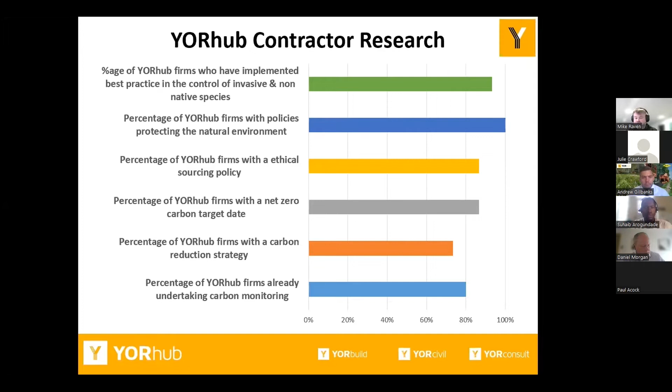And just to take off from where Mike stopped, it is important that YORhub, and indeed the whole industry, is measuring the same thing across board when it comes to carbon emissions, so that we can then move towards the reduction of the carbon. And so in a bid to ensure this, that's why the carbon KPI came about, to develop a KPI that can serve as a benchmarking tool across the industry. So to develop this KPI, we thought it was important to ensure that we involve the people that are at the center of measuring, and indeed that will be responsible for reducing this carbon, which are the contractors, who are the major stakeholders.

So the KPI development started with a stakeholder identification, mapping and analysis. So what we tried to do with this is to ensure that we pick those that are directly involved in monitoring carbon during construction projects. So upon analyzing this, we also thought it was going to be interesting to include people from both big and small contractors. So this was ensured during this KPI development. So we involved people from both tier 1 and tier 2 contractors.

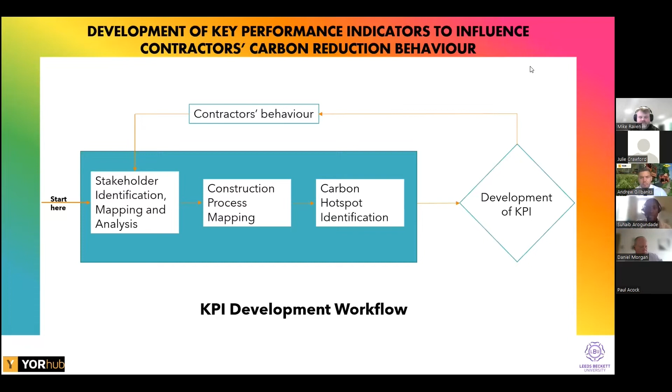So the next slide basically shows some of the KPIs. Indeed, we have about 41 of those KPIs that have been developed. But I felt it would be interesting to pinpoint some of those KPIs so that we can have a flavor of what this carbon KPI is about today.

The carbon KPIs have been categorized into both transportation and construction project/construction process, which is stage A4 and A5 of the life cycle carbon emission. This categorization has also been broken down into different activities that take place during the transportation bit of the construction project.

Transportation has subcategories: material transport, machinery, workers and visitors, and waste transport. Construction has about 8 subcategories, but this is just to give us a flavor. Out of those 8, I've decided to share part of the machinery, the waste, the material, and the workers and operatives subcategories, so the KPIs for all of these are what you can see on my screen.

For instance, under material transport, from the development of the KPI and the discussions we had, we identified average distance traveled as one of the KPIs that needs to be measured, renewable fuel usage on site, percentage of material purchased locally, and even the amount of material used on site also comes under that KPI.

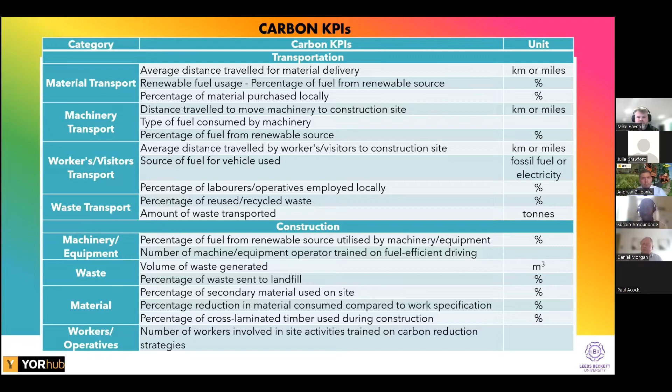So a wider survey has gone out for this, and we are getting responses. This is going to be used to pick the essential KPIs that would then be utilized. Just like Mike said, those essential KPIs can then serve as a benchmark for everybody, so that everybody is measuring the same thing and we can all understand that the reporting we are doing is actually similar.

So another wider part of this research is, after identifying those KPIs, they've gone out. Apart from those KPIs, there are other bits that have gone out with them, some from this model. You can see on the left-hand side the carbon reduction drivers. We've identified 18 drivers that could assist contractors to reduce carbon, such as probably introduction of standards like PAS 2080, probably incentives for contractors within the bid if that would drive them to reduce carbon on site, and some other drivers.

We've identified 16 barriers that could stop contractors from carrying out carbon reduction on site. Some of those barriers could be lack of support from top management within the contractor organization, or lack of collaboration between clients, consultants and contractors, which we found is actually a big thing. It could also probably be non-availability of low carbon materials.

All of this is going to be tested against 33 behavioral tendencies that we've identified. Those have been split into perfunctory, which is just talking about the carbon reduction target in the contract - will that drive contractors to reduce carbon? It could be voluntary, which is the consummate behavior. Or could it be that they need more relational behavioral tendencies for them to reduce carbon on site?

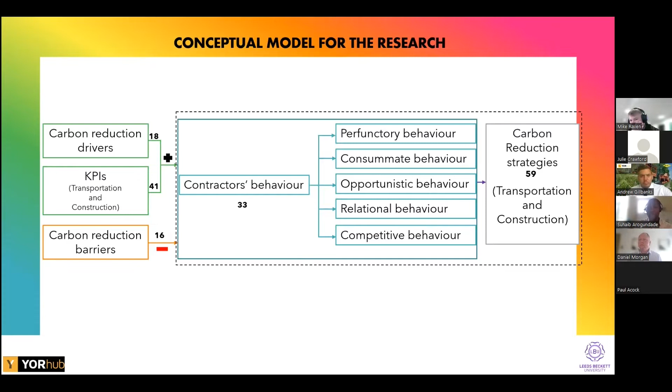Thank you, that's brilliant, thanks Suhaib. It's a massive piece of research that you're doing. It's absolutely critical for YORhub. I think also you talk about the wider industry, and certainly our colleagues in the National Association of Construction Frameworks that YORhub is a member of are obviously very interested in the work that you're doing. As part of the National Association, we're keen to make sure that what we're giving is aligned to our clients up and down the country, but also what we're asking our contractors to deliver are aligned again. Taking Colas as an example, and I'll shut up in a moment so we can hear from yourselves.

You obviously work across the country. You don't want in Yorkshire to be asked to be measured against one set of KPIs, and then if you're working over in Manchester, suddenly there's a totally different set. We're acutely aware that we want there to be good alignment across the whole country, so that we're disseminating our best practice, but also not making it overly difficult for people, because one of the key bits that Suhaib referred to in terms of the behaviours - we don't want to make things more difficult for our framework partners than we have to.

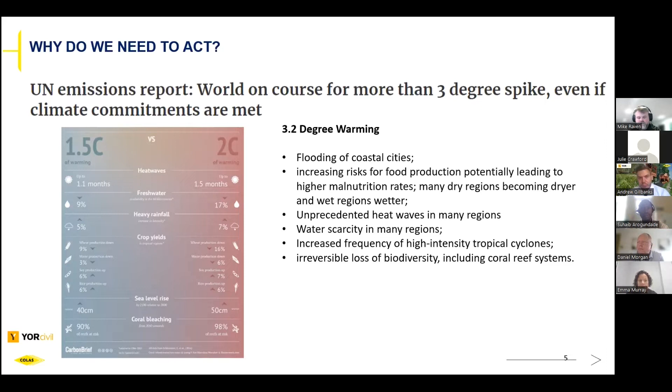So as part of that, we can see what the future holds for us. The IPCC report was produced, and this saw 234 scientists from 66 countries working together to show what the future holds for us with regards to climate change.

What they said was that climate science is clear. The physical science basis shows indisputable evidence that human activity is basically causing climate change.

It's showing that we're going to have heat waves. It's showing that we're going to have heavy rain, and basically human activity has caused this, and it hasn't been seen for the past 2,000 years.

So what that's basically saying to us is that these 5 key takeaways were the outcome of that report, showing that changes in the climate are widespread, rapid, and intensifying.

There's no going back from some of the changes in the system. However, some of these can be slowed and others can be stopped by limiting the warming. Unless there are immediate and large-scale greenhouse gas emissions reductions, limiting warming to 1.5 degrees will be beyond reach.

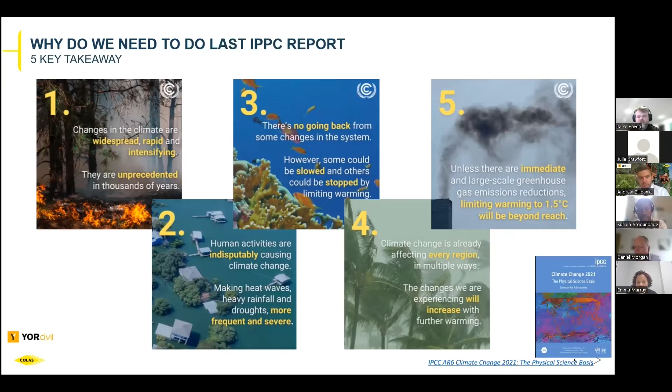So some of the outcomes from that, we've had the Paris Agreement, where it was discussed that we want to see no more than 2 degrees global warming, but ideally this should be at 1.5 degrees.

We've seen PPN 621 coming out last year, where all companies working on behalf of public procurement need to provide a carbon reduction plan. We needed to have that published on our website, and it needed to be part of the bidding process, the tendering process. We needed to supply our carbon reduction plans.

National Highways said that their supply chain needed to sign up to the science-based targets as well.

It's low-hanging fruit with what we have direct control over, which is in scopes 1 and 2. Scope 1 being the fuel that we use for our vehicles and our buildings, and then scope 2 is our electricity, which we use in our buildings as well.

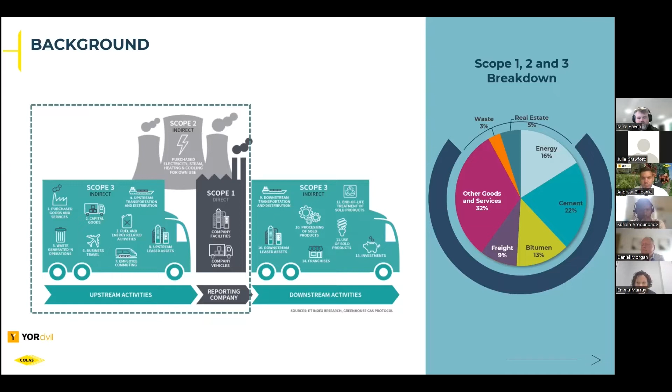Go to the next slide, please. So what does this mean in the highway sector?

So as a company, we've been looking at our strategy. This has come from our COLAS group, and we've been putting in actions to help us look at this. But really, as a company, we need to be looking at how climate change is going to be integrated into our group strategy, how our people are trained and aware of what their impact has on this subject.

We need to be having a look at our plant and our equipment and our buildings, and having a look at how we can decarbonise those, having a look at the products that we buy, having a look at the products that we make as well, and to decarbonise those.

Carbon accounting is a really big change, and we need to be increasing the amount of data that we're getting into our carbon footprint, and therefore we need to be having a look at automating that where possible as well.

And then also we need to be really thinking about biodiversity as well. We need to get that as being part of our climate change agenda, because without thinking about biodiversity, it's going to be really difficult to control our carbon footprint.

So we've got a number of different tools that we use as a company. So far, we've been using Smart Waste, and that's how we're recording our energy usage, our waste, and some of our other sustainability data. We've already seen over the past couple of years that this was a really good option for us, but we're really relying on Smart Waste to come along with the journey that we're all on.

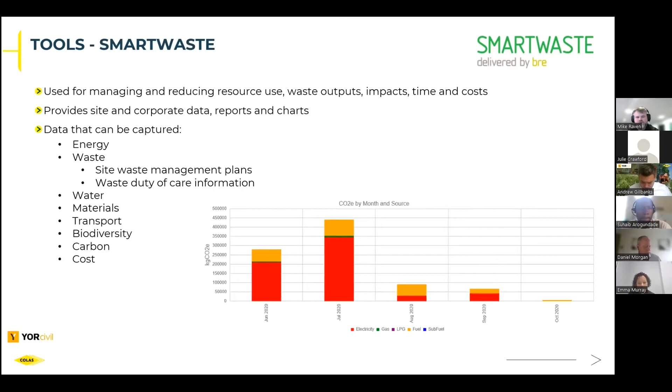The next tool that we're using is the Supply Chain Sustainability School. We're using this to help us raise awareness about the subject, both to our own people as well as to our supply chain. They can also help us with a carbon tool, so we can capture data from our supply chain using their tool, which is free to use.

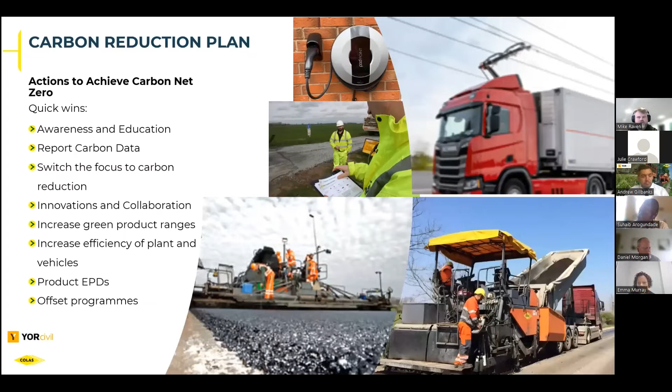Some of the other actions we've done as well: we've been reporting our carbon data, and we've got awareness and education through different programs. We've really got to focus on carbon reduction. Previously, as an industry, we've been thinking about the price of the job, of the works we're doing. We really need to be thinking about how this is going to help us deliver a carbon reduction. So when we're winning new work, how can we deliver a low carbon project straight away? And then innovations—as Andy said, we're an innovative company, and we need to make sure we're not just thinking about other topics. We need to be thinking about carbon as part of our innovation programs.

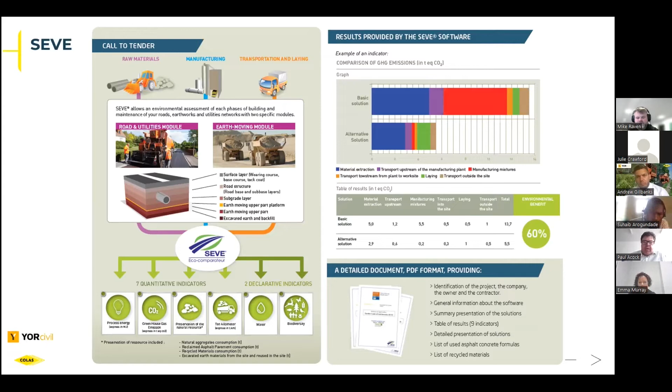Moving on from this, and basing it on the SEVE process: asphalt production here, with a reference of 37.5 million tons, is something Colas does worldwide on an annual basis. As Colas worldwide, we're looking at various forms of reduction and where the key areas of that reduction are. If we look at warm mix as a temperature reduction, as an additive, the use of RAP—or increasing RAP—to utilize as much as possible, when all this is added up, even on current or even on target, those efforts only actually represent a 5% reduction in that target, which is quite an eye-opener for us.

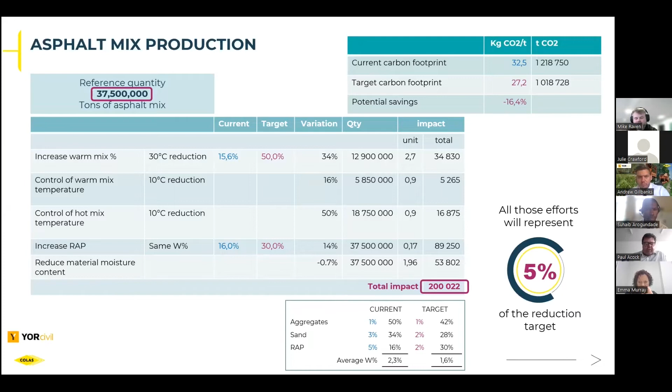So from that, we're looking at how we can increase that reduction target. Some of the key areas we're looking at—on this slide we've got a classical solution on top, which gives a breakdown of the individual parts, as mentioned before, on how that carbon is calculated. Then we look at alternative solutions. We could do as many as we want, but it's interesting to demonstrate the type of other products available that would make a bigger increase in that carbon reduction. If we were to increase to 50% RAP, we'd see an increase to 13%. If we moved to a completely different system utilizing other recycled resources, combined with mix designs and so forth, we can come up with larger numbers—up to 41% on one particular product. There could be others, but this is a demonstration to show the potential.

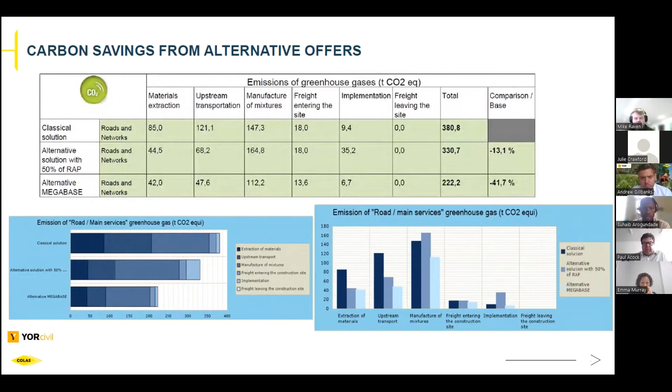If we could move onto the next slide—this particular one shows how the reduction is made in this case, actually through performance. The Megabase is a product that utilizes reclaimed rail ballast, so it's a secondary use of a perfectly usable aggregate.

And from that, looking at the solutions in the bottom corner there, particularly on the mixed designs, we can show not only can we achieve similar or greater performance utilizing these materials, but we can also reduce the thicknesses of the materials as well. And in combination of these two, this is where we can really generate significant reductions in carbon alongside warm mix, cold mixes, and so forth. So it's a way of looking outside the box and looking at alternative ways to try and achieve these figures and get it within the timeline.

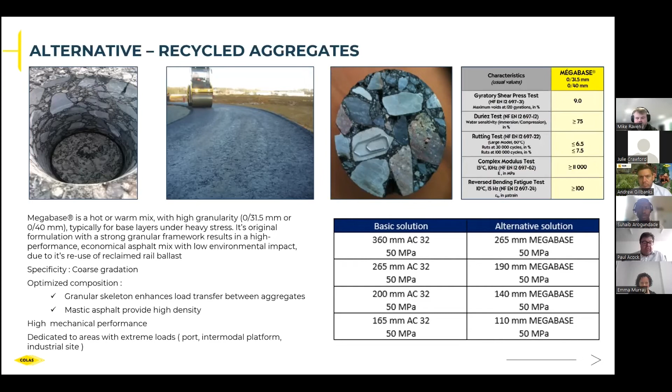So this is a good example of a product that does exist, and it is being used where needed, but it just highlights the areas of where reclaimed materials can be utilized and it's not affecting performance or indeed cost. Again, this is another area moving away to an in situ process, which is a recycling in situ process. Again, SEVE uses the conventional process of basically planing out an inlay. Retread is, as I said, an in situ process, and you can see the vast reduction in particularly transport, because obviously it's done in situ.

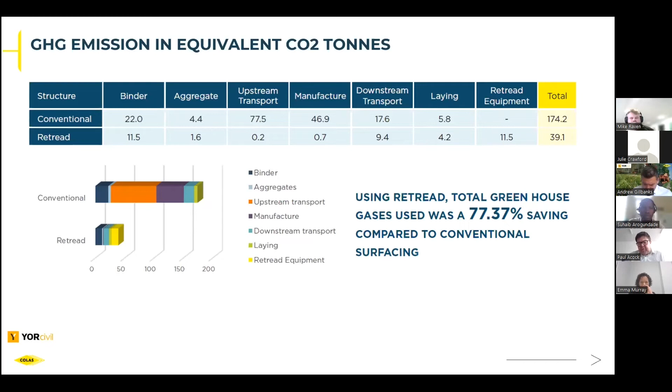Moving on, again, Colas has developed a series of in situ recycling systems. Obviously, they've been around for quite a long time, particularly with foam. These systems use bitumen emulsion, so you get full encapsulation. The main difference between these processes is that it's a continuous train. So this could be on quite high profile roads, where you're planing at the front of the train. It's being mixed with the emulsion and any other additives. It's then put through a paver and then compacted, and then the traffic can go straight on it. So it's a continuous system that doesn't require transportation of materials, and again, it utilizes the existing road structure.

Yields, we've got some trials coming up. But typically we're looking at 10,000 square meters per day activity on pretty much full width lanes. As long as they're long and straight, the train can be quite long, but this is really targeting the larger road structures that we can do in very short periods. And as you can see from the picture, it can also be carried out at night time.

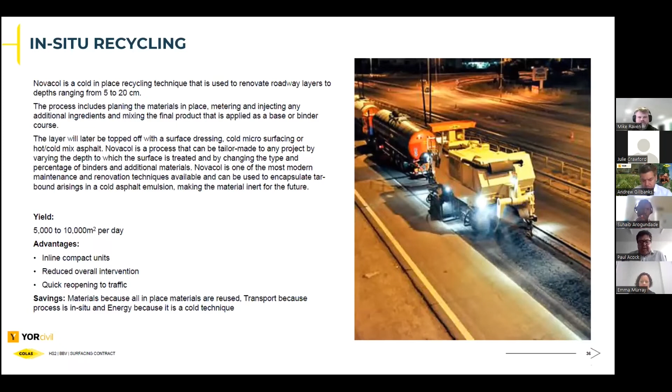So what's happening around the world? Again, there's two areas really that we're looking at. We're looking at alternatives to bitumen. So we have Vegecol, which is a bio-based binder, and we have an asphalt which uses recycled materials from our colleagues in Australia. So Vegecol, as it pronounces, is a plant-based binder. It's a clear binder, but it has a very low carbon footprint compared with conventional bitumens. It's utilized in hot mixes and could also be used in surface dressing binders as well, hot or cold. There's quite a few trials happening in Europe on this particular product, and we're looking to do some trials in the UK on this as well.

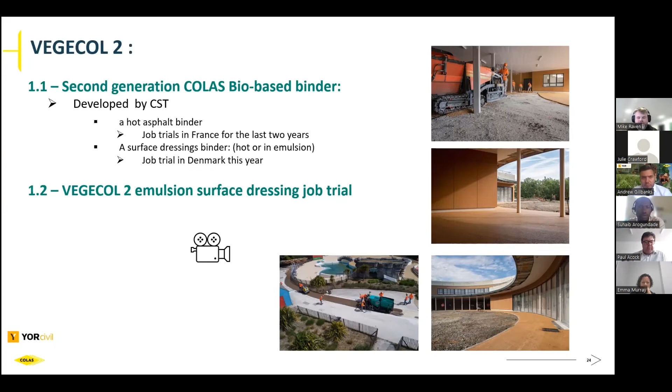Other areas, again, as I said before, with Australia: obviously with a lot of the conventional materials, which we're already aware of, there's exposure to fumes because of hot mix, hence we're going down to warm mixes. The resources that we have to utilize and the amounts of gases that they generate through heat, cost opportunities, and obviously the key area is also quality, to make sure that we can achieve the same performances and life cycle costs on alternatives to what would be the conventional materials.

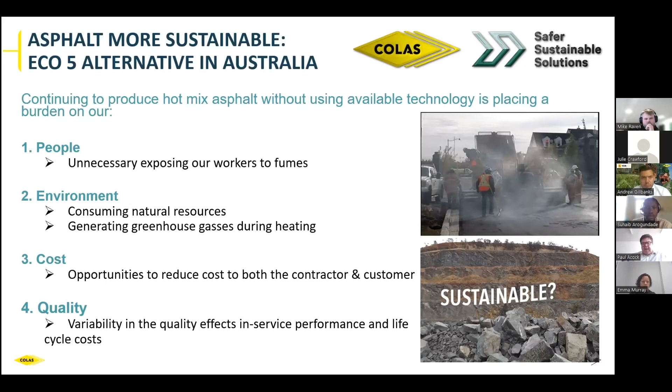So this one on Eco 5, which should be on the next slide. This is a process that has been developed, as I said, in Australia, and it utilizes 5 components all in one mix. And actually the performance is slightly higher than the conventional material. So not only are we looking at warm mix activity, we're also looking at a high use of RAP, but also introduction of recycled crushed glass, crumb rubber, slags, fly ashes. There's a series of them, and they give you different performances depending on what you want. The key area with these types of materials is that we're not just putting all these materials in because we can.

They're there for a reason. So each one has a particular requirement to improve workability for laying, let's say, or it's very good for rut resistance in high temperatures. All of these are allowed within the structure, and the trials have been down for several years, and the performance is still up there. It hasn't deteriorated at all.

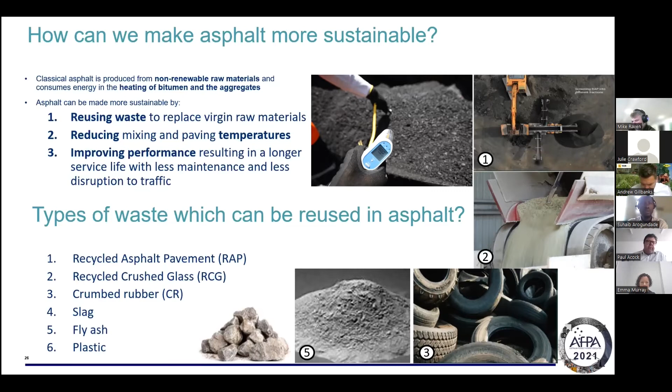But I think on the next slide we will see the sort of makeup on there. So we've got the performance of the mix at the top against the standard AC20 and an AC14 surface course, and the type of material usage or recycled that we're using per kilometre, as mentioned there, is quite significant. Interesting, the paving temperature is 90 degrees as well.

So all in all, the whole process is being obviously monitored, and we have full information on these types of materials. But it's just to demonstrate really what Colas, from a worldwide perspective, is trying to achieve, to try and reduce the amount of carbon use in our particular side of the industry. And these obviously can be communicated around the world, and certainly into the UK, which we're hoping to achieve.

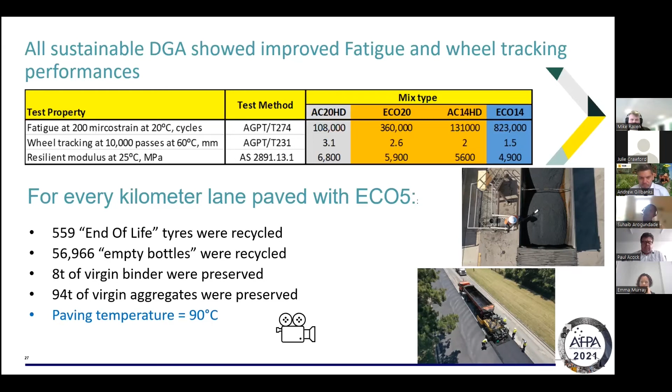So that's me. Thanks, Paul. Dan, we have about 8 minutes, so no pressure. Oh, I think I can get it done in that time. Thanks, Paul. Look, I think I get the simplest part of the presentation, really.

I think we've heard so far on how we're looking to move to track carbon. We've heard about the burning platform, which talks about what's going to happen if we don't move to a low carbon industry, and Paul's shown us where we're moving to across the world. Thankfully, my bit can talk us through some subtle changes that are available to us right now in our industry.

So the mine to mill strategy, and the wonderful thing about our industry is that it's been going a very long time, and we really do understand it. The use of quarried aggregates in the UK: generally we identify where the mineral is. We identify what the need for that mineral would be in the industry. We then move through a simple process of scheduling, and I say simple because it could take up to about 10 years to go through planning to get a new quarry opened.

We open, we drill, we blast, we excavate, we move the material through the quarry, we do primary reduction, and then we knock the material down into the sizes that we'd like to use in the industry. They either go out to be sold, or we stockpile them ready for sales in the future. So it's a base industry. It's very, very simple. The one thing that I would say is we cannot manufacture road surface aggregates anywhere.

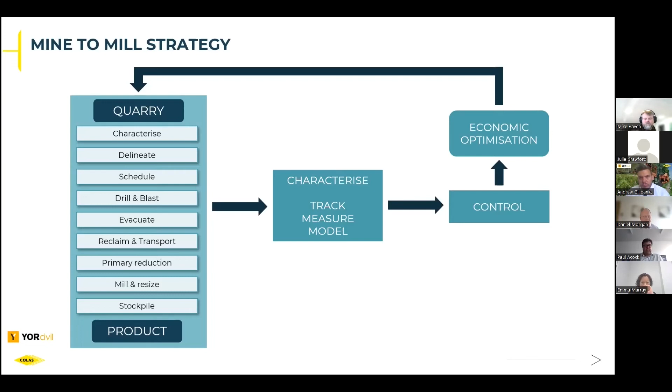Move me on, please, Andrew. So what we've got to do with the materials that we have, and with the quarries and the opportunities we have at the moment, is we all have a responsibility to get involved in the specification and influencing what type of materials we're going to be using in our roads for the future.

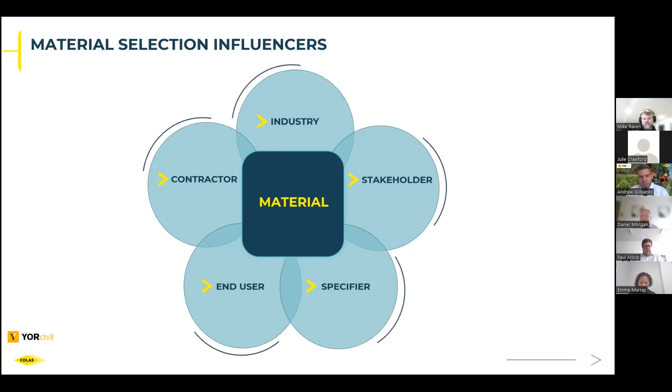We've used and talked about recycling. We've heard a lot about waste management on sites. What we've not talked a lot about is the waste generation back at the primary unit. So this is where we need all of the people on this slide here to be involved. Go on, you can take me forward this one. Currently, what we're doing as an industry is we are stipulating the use of 10 and 14 millimetre aggregates.

What that means to our production is that on a typical quarry making 300,000 tons, the reduction rates that we get to get 10 and 14 millimeter products to go into our surface course aggregates, we take 1/3 of saleable product and we leave 2/3 of a low value waste. So that's your 6 mil, your dust, your 20 mil products.

Generally what happens is your plus 14 will go back through into recirculation and will get crushed down again, and we'll make some more 10 mil and some more 14 mil, but it will also make a lot more 6 mil and a lot more dust, and it will add to this problem of waste generation.

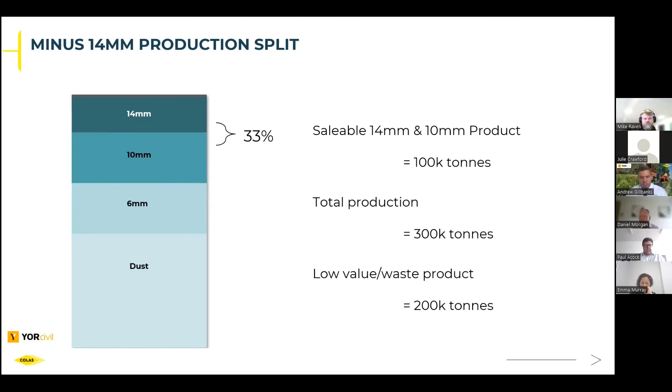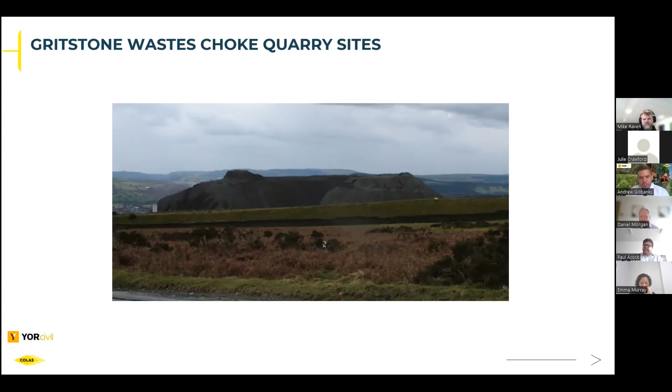That is exactly the same type of problem that we are seeing in our quarries around the UK, where we are specifying, as I said, 10 and 14 mil, just taking 1/3 of the material. So coming back to what I was saying earlier, if we're looking to produce 300,000 tons, we're only actually selling or got a saleable product on the first time round of 100,000 tons. Now, I said this is easily changed in our industry at the moment, because we as an industry, we're very innovative. We come up with great solutions.

This product that's being laid here is a 20 mil SMA. The 20 mil SMA will give the same density and the same performance, the same durability as a 14 mil SMA. The texture depth is a little bit higher than what we'd normally go for, but it's a one pass laid up to 75 millimeters in thickness. You can use it as an integrated regulating layer. As I said, single pass.

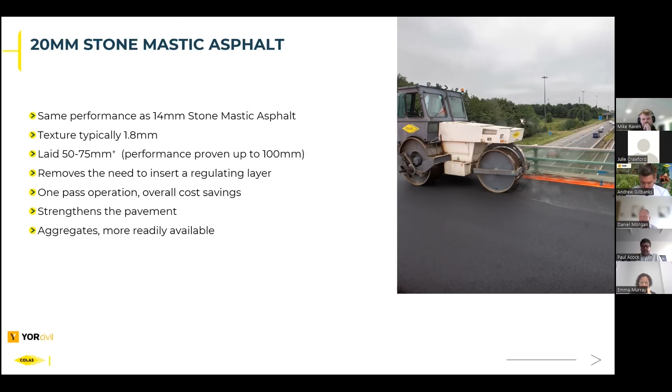Therefore, you can reduce your time on site. We can reduce the carbon cost of bringing materials to site, and the use of going back over the same area over again for multiple passes of the paver and the rollers.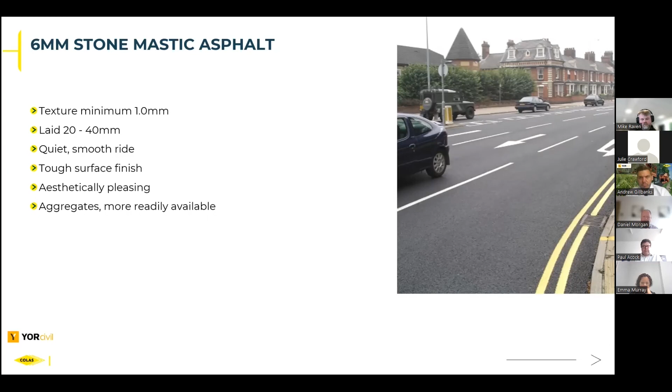If we don't like a 20 millimeter because we think it's too open, we can also use a 6 millimeter SMA. Now this gives us a texture of around about 1. Nice, great, tight, very well knitted together, smooth rides, very, very quiet, very durable surface. The product is very, very tightly compacted. Therefore, you get a very, very good durable surface from this. And again, what we're doing is utilizing that full suite of products available to us that the quarry's producing.

What does that mean moving forward? Well, if you're utilizing more of the products that are available to you, suddenly you're getting a better spread of the materials, and therefore you're reducing your waste. Bear in mind that if these sites weren't effectively extracting holes in the ground, and they weren't taking the material out and leaving a hole in the ground to be able to put something back in again, this material would have to go somewhere. It would have to go to landfill.

So effectively what we're doing is focusing on landfill that's generated as waste on site, but we're not looking right away back through the supply chain to see what waste is generated back at the supply point. So, you know, it's a 100% improvement on what we would see on the site on the basis of 33% for 10 and 14, and suddenly we're up to over 2/3 now.

So the utilization of products from a site, if we got together as an industry and were more open to taking 20 mil and 6 mil across the board. These products are not new, as I said. There are HAPAS, BBA accreditations for all of these. All of your suppliers, not just Colas, this isn't a sales pitch, all of your suppliers have these products available to them to be picked up off the shelf and utilized in the industry right now.

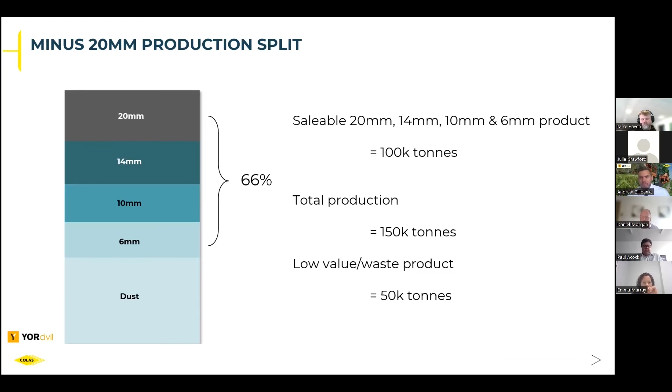Andrew, I think that's me done on my bit. I think I got you there in your 8 minutes. So yeah, about time. Thank you.

Okay, then, so to kind of just really wrap this up, from a Colas perspective, we think there's 3 potential actions we can take away. So for clients and contractors, you could identify carbon production across scopes 1, 2, and 3, the carbon that you produce and the carbon that your stakeholders produce, and back to Dan's point, where you source your materials from. You can identify and develop your carbon reduction roadmaps.

And then lastly, and probably more importantly, collaborate across the sector with stakeholders, sharing best practice on carbon utilising the wider YORcivil community. I think that for me, achieving net zero we will only get there by collaboration and innovation, working together, as Dan mentions, around changing specifications whilst achieving performance of materials and products. And I would like to see us all collaborate in the future. And it's something that I've been discussing with YORcivil, how we can get more clients and contractors involved.